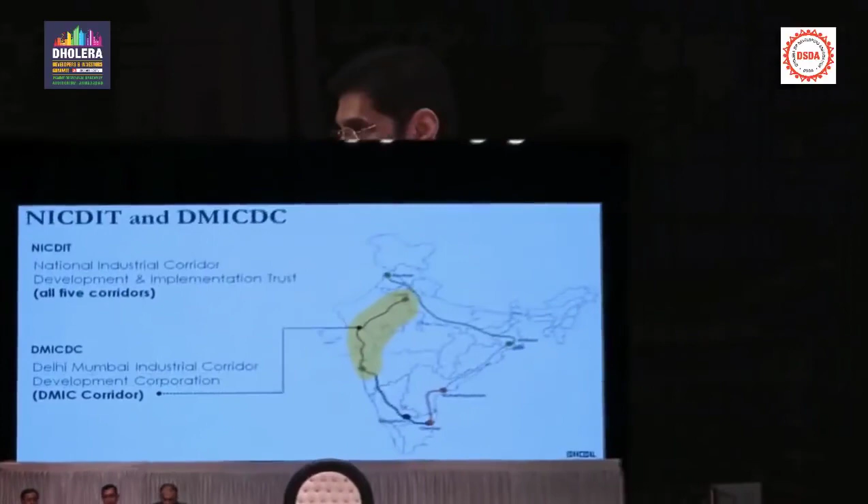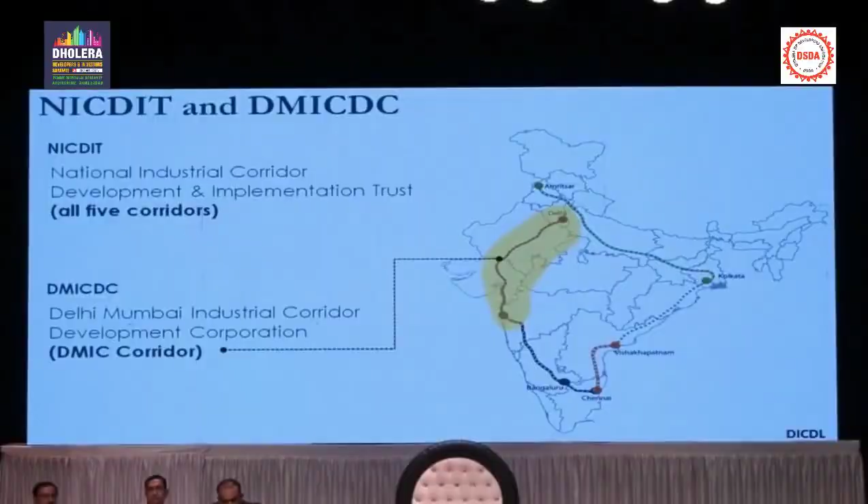So now you know the difference between where Dholera is as a greenfield smart city and where the other smart city programs are. They have no connection, the funding mechanism is different, and the management is completely different. But they are routinely mixed up. One is called the other, and people call me a smart city Dholera, and they think I'm a part of the brownfield smart city.

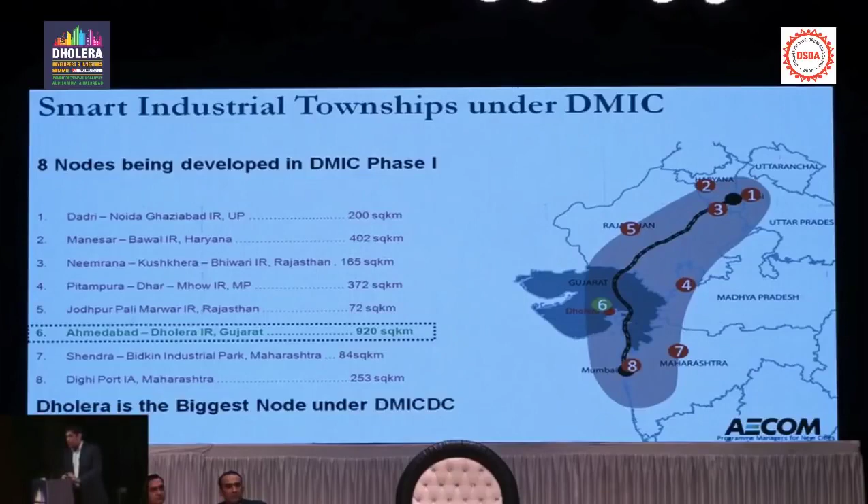So on this Delhi-Mumbai Industrial Corridor, there are 8 different nodes, as they call it, industrial areas that are planned. And you can see number 6 is Dholera. This is the largest node on this Delhi-Mumbai Industrial Corridor. So Dholera is the largest. It is also the node that has come farthest along in terms of construction.

So how big is Dholera? Dholera is 920 square kilometers, but if you compare that to some countries like Singapore, it is even bigger than Singapore. So we are almost building a country like Singapore, because Singapore is 71,900 hectares and Dholera is 91,000 hectares. So it's almost 20% bigger than the country of Singapore.

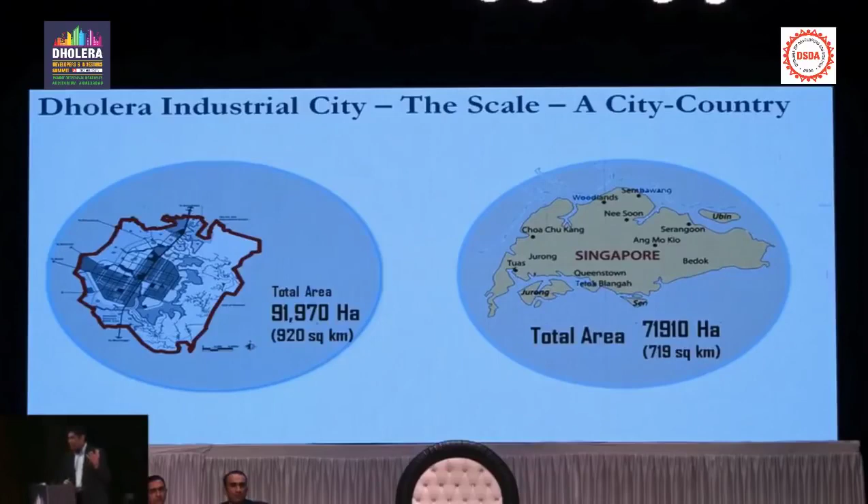So now you can imagine why it takes time, and I will explain that also. But when it's completed, after everything is finished, 30 years later the estimate is Dholera's population will be 2 million people, 20 lakh people will live there, and approximately 800,000, 8 lakh new jobs will be created. These jobs will increase our manufacturing GDP.

These are all new industries under the Make in India program, which is what's going to create the economy for India.

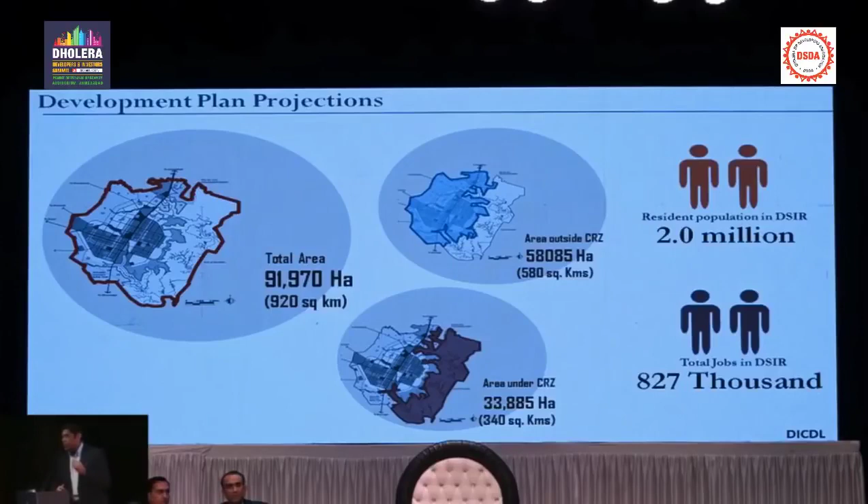I've been working on this project since 2013, and a very common question that comes to me is, why does it take so long to build a city? So I wanted to show you the timeline as to why it takes so long.

In 2009, we enacted the SIR Act. But once the SIR Act is enacted, several things have to happen before you start building a city. You have to create a development plan, which takes some time. The development plan then has to be approved. To get a sanctioned development plan takes anywhere from 3 to 5 years, because it's a formal, official document of the government of Gujarat. It has a public review process, a public comment timeline, and it takes that long.

You cannot rush it. It's like saying, deliver me a baby in 3 months. The baby will take 9 months, give or take 15 days, maybe a month. So a development plan will always take 3 to 5 years because it's a time-consuming process.

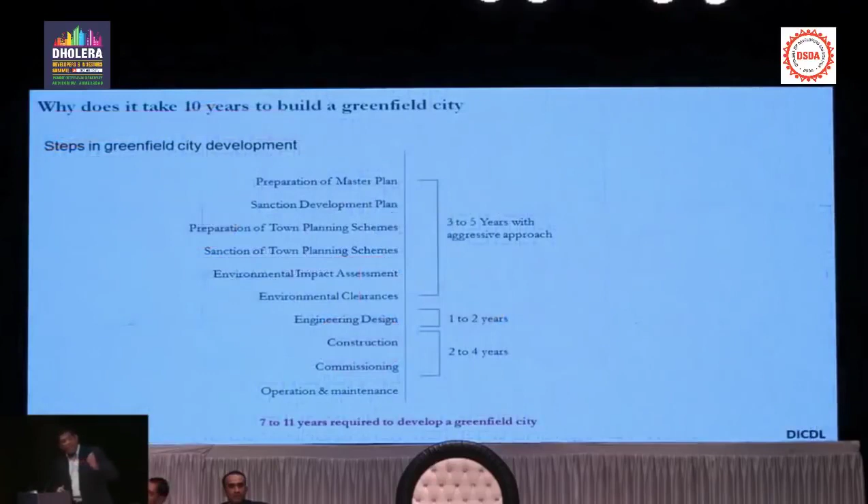After the development plan, we have to do the design. After the design, then we have to do the construction. So you can see, by the time we go through the entire process, we are anywhere between 7 to 11 years.

Now Dholera, when it was advertised, Modi ji first announced it in 2009 I think - Dholera city will come, it'll be built very big, like Singapore. And everybody was saying, how delayed it's becoming, you cannot build a city. But now you can see why it takes time.

There's no way - maybe a year or so we could have expedited more. But some of these things take time - development plan, design, construction. These all take time, and it takes 7 to 11 years to build it.

I also want to put in perspective Songdo in South Korea, which was the latest brand new city like Dholera that's being built, started in year 2000. And today, in 2017, it is only 50% built, and it is only 8 square kilometers. We are starting with 22 square kilometers, going up to 900, and Songdo is only 8 square kilometers, and it's taking them 15 years.

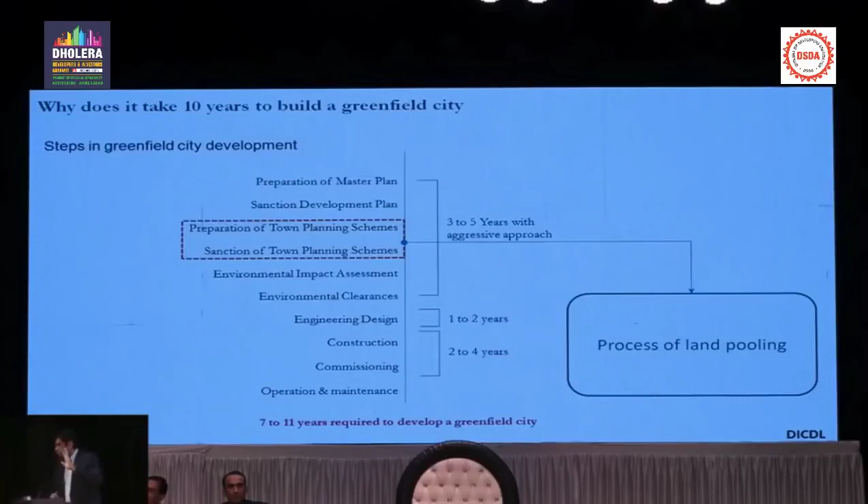So we are not behind in terms of benchmarking in the world. We are doing a great job. I want you all to know that the state of Gujarat, the Gujarat bureaucracy, and the engineers are all doing a fantastic job. So don't worry, this will happen, and I will show you how this will happen.

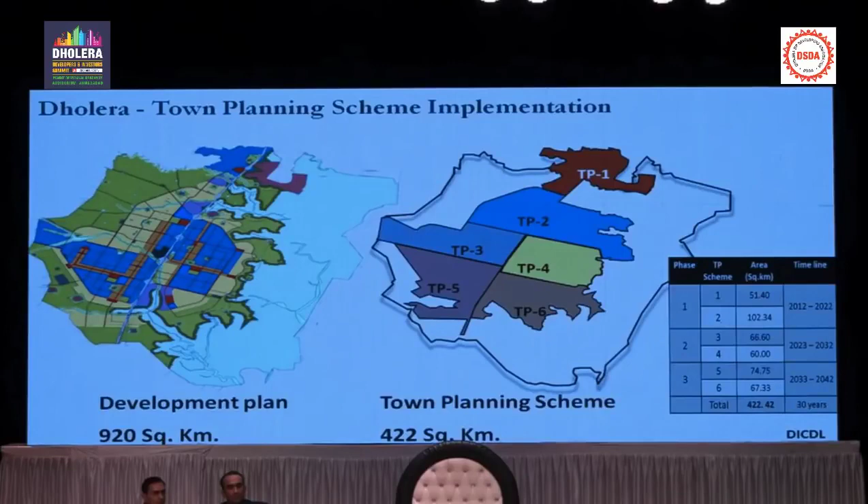Phase 1 is up to 2022, and we are doing the construction. After that, phase 2 and phase 3 will start. Within phase 1, it's 153 square kilometers, which is TP1 and TP2. We started construction work on this in 2013-2014.

But we soon found out that the cost of building trunk infrastructure - those of you who are in construction will appreciate this - for 153 square kilometers is close to 40,000 crore. Now who will give us this 40,000 crore investment? Because there's no private investor that's going to come and build all the pipes - water, wastewater, power, gas - everything has to be built, right?

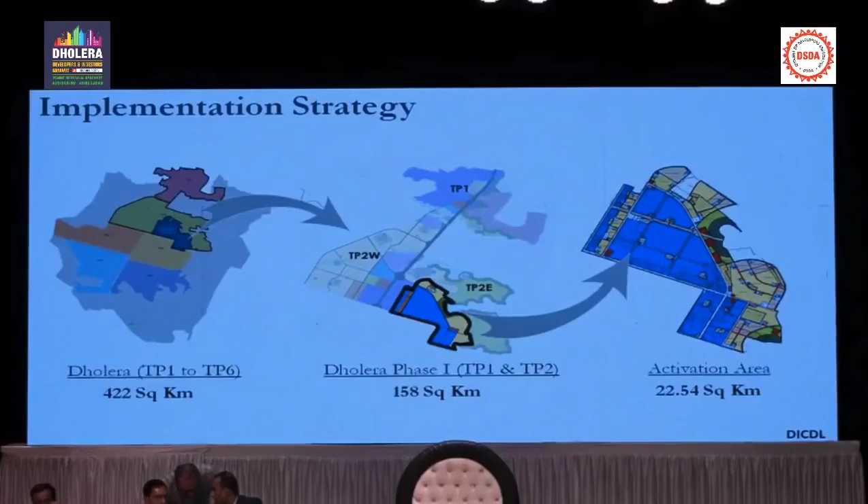Gandhinagar's planning started in 1965, and even now it's not 50% complete. So you can see new cities take time, and 22 square kilometers is not a bad size. It is a big size, but because of industrial production, it is going to go very fast once companies start relocating.

So in this 22 square kilometers, this is the breakdown. In 5 years, we will have 76,000 jobs in Dholera, in the activation area. Population will be about 1 lakh. And this purple area you see is completely industrial. So majority of the activation area is completely industrial.

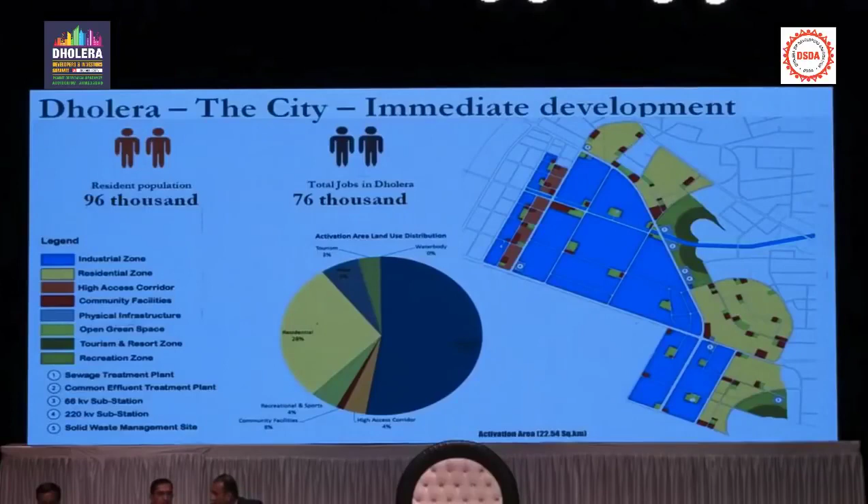That's where our first client will come, tenants will come, and that's where the city's beginning will happen. And all the yellow is residential, the green is green cover, and all the red dots are public amenities, parks, playground, water, sewer, those kinds of things, power plant.

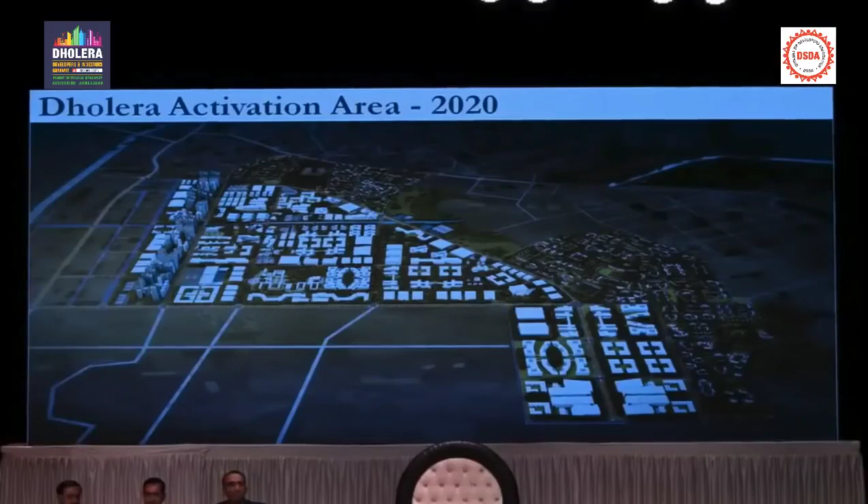So 22 square kilometers is our footprint, this is our footprint of 22 square kilometers. And this footprint, Dholera, is going to be managed by DICDL.

DICDL is a special purpose investment vehicle, SPV I should say, which is formed between DMIC-DC and the state government of Gujarat. And this is a special partnership, a 51-49% partnership, in which DMIC has put in 3,000 crore cash, and the Government of Gujarat has given 3,000 crore worth of land. So our corpus became 6,000 crore.

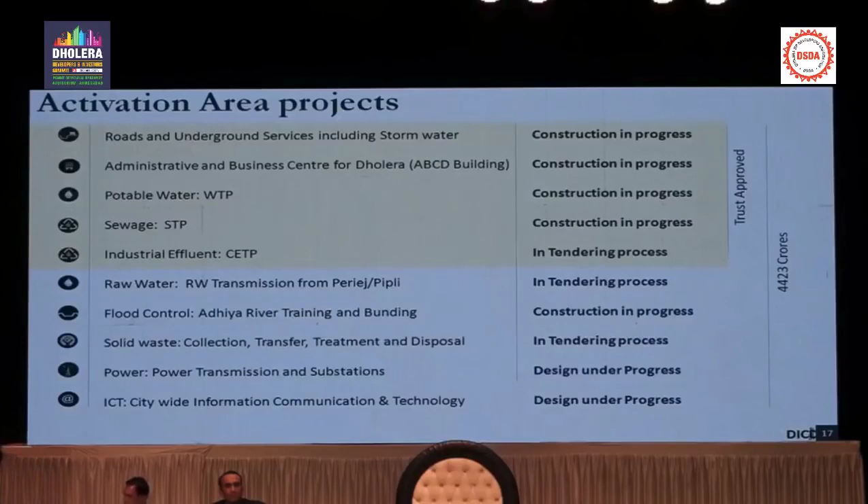The balance of the money, 4,400 crores, we are going to find some PPP, private partner. It is mostly in the power and water side, and we will figure out how we will get that funding part done. But right now we are proceeding.

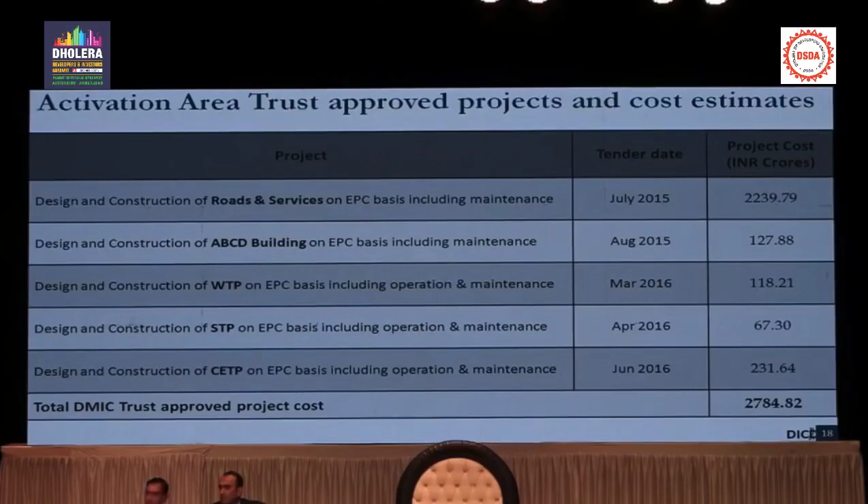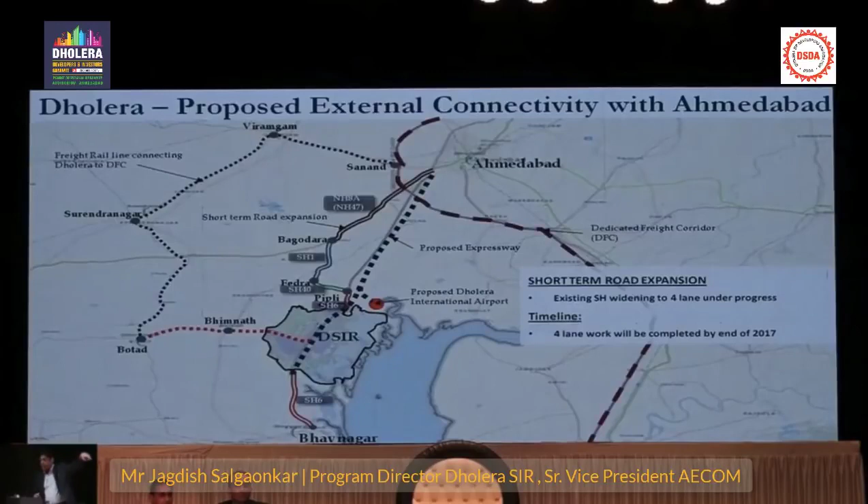I also wanted to point out the existing state highway - I'm sure all of you who have driven there have noticed that it's being reinforced. The main reason for that is because the expressway will take about 4 years to build. We did not want to take any chance, so we are already strengthening the existing SH6, SH1 and 40. They have already been strengthened, and lanes have been added for capacity. I'm sure those of you who drive down there have noticed that.

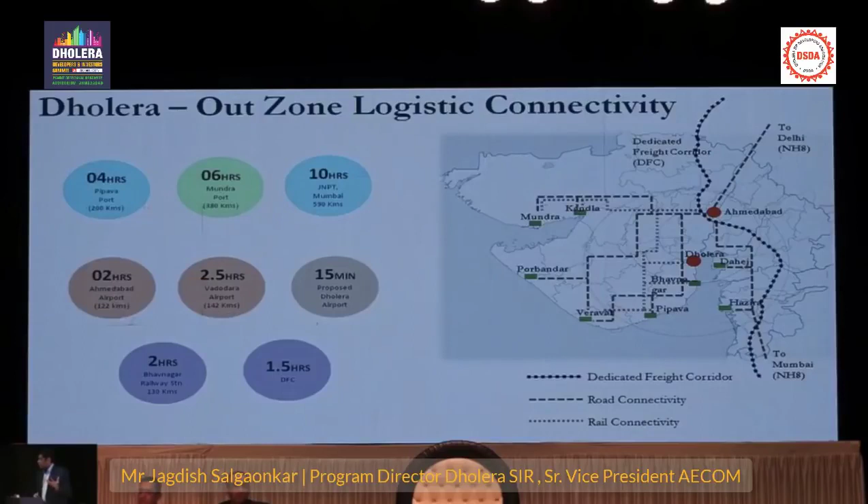Overall, from a connectivity standpoint, once you are near Dholera, it's extremely well connected to all the ports by road and rail. This is a slide we created for our industrial clients to show that within a 6-hour drive, they can be in Mundra, or within a 2-hour drive, they can be in Bhavnagar, because our industrial clients mostly want to know how they can evacuate their manufacturing goods. So they have easy access to airports and ports, both by rail and by road.

Okay, so now let me switch gears a little bit and speak about smart cities. I'm sure the word smart cities has been so overly used that people are curious what a smart city actually means. Can anyone give me a one-line definition of what smart city means to them? Does anyone have that? Okay, well, I'll give it a shot then. This is sort of my own definition, compiled from many different sources, but it's really our thinking of what we have come across.

A smart city - the city itself is an inanimate object. It is just a dead thing. But what makes it smart is that we have installed systems, processes, and devices into this infrastructure so that the people, you, the businesses, can make smart decisions.

So let me give you a few examples of smart decisions. I'm sure most of you may be familiar with Google, right? Nowadays, if there's a traffic jam somewhere and you need to go from Ahmedabad somewhere, how many of you Google frequently and ask where the traffic is and which route to take? Quite a few of you - I've seen some hands. So what does Google do? Google takes the data and gives you the information so you can make the smart decision, correct?

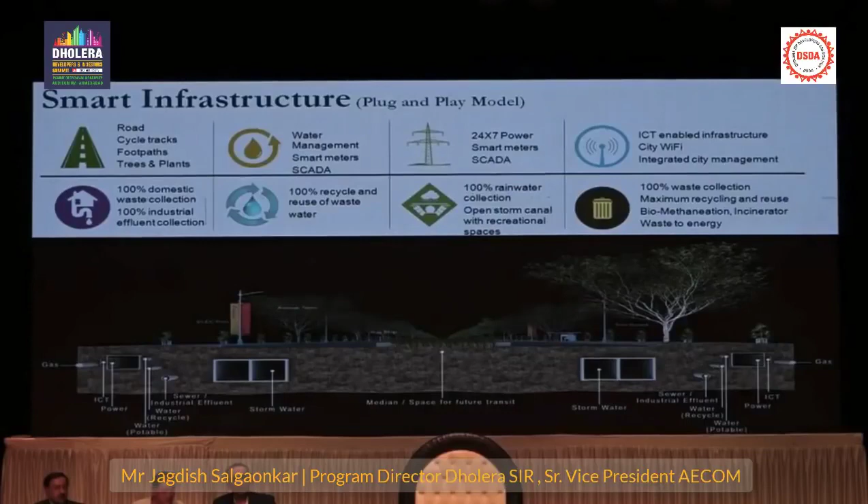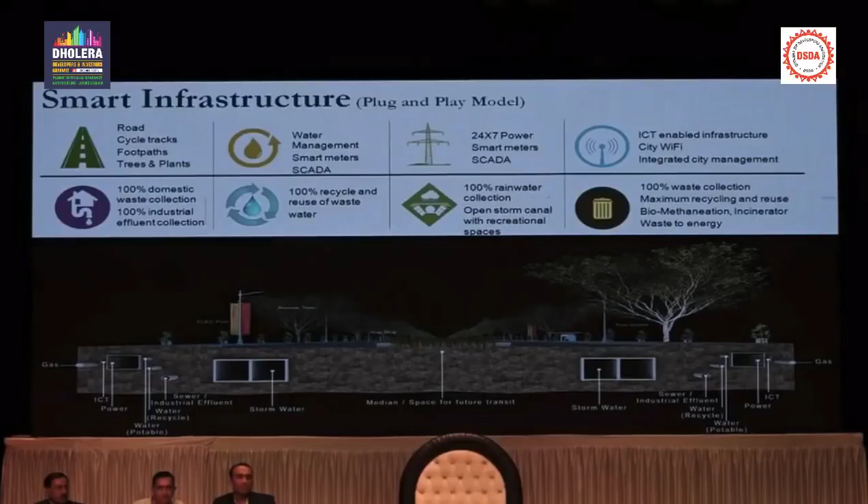So here's a snapshot of everything that we are building. This is a typical cross-section of our road, and there are a couple of points I want to make here. Number one, first time in India, we are building all of the trunk infrastructure underground. Water, power, ICT, gas, wastewater recycle, everything is buried underground, even the power lines.

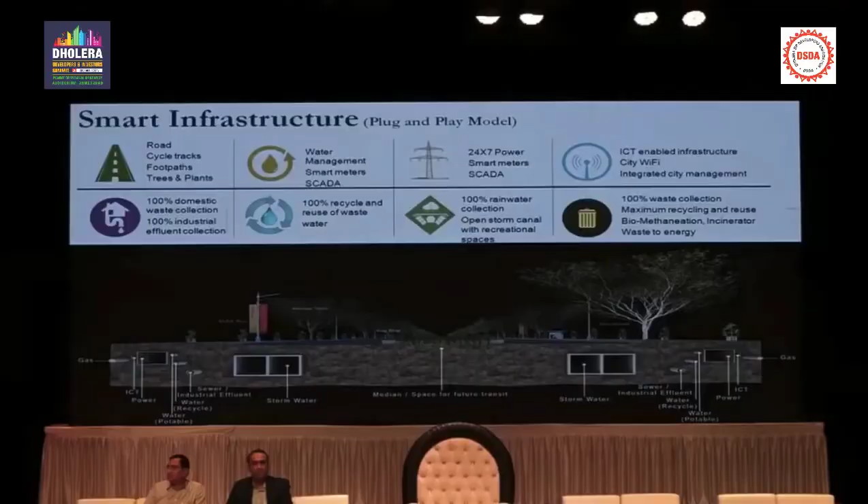So all this costs money. You don't get this kind of infrastructure in any industrial estate in India, in any city in India. That's why Dholera is world-class and the best.

So in terms of different infrastructure, I just want to give you the highlights of each one of those components. In roads and services, for example, we are building almost 300 lane-kilometers of road. It's a total of 72 kilometers of road, but with multiple lanes, so we call it 300-kilometer lanes of road.

Completely traffic-integrated sensor system. Each traffic light is going to have cameras, speed limits, sensors. So all that information I talked about, devices being smart, will be transmitted back to you so you can make the decision which road to take. That kind of information is going to be proactive, not reactive.

So we have dedicated cycle tracks. You can see how the cross sections are designed. And this is the overall roadmap. And what you will see right now is...

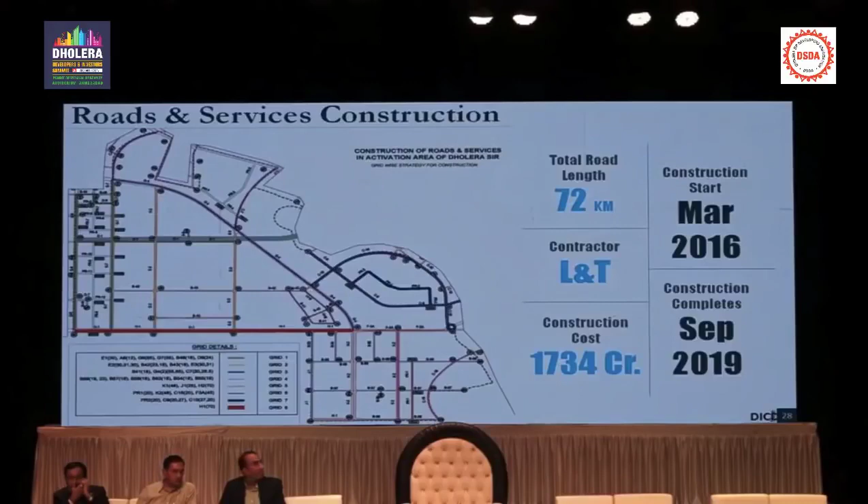It doesn't work on the screen, but G4, that line that comes from Dholera village, that is the road G4 right now that's being built. I'm sure anybody who has gone to Dholera right now can start seeing the city is beginning to take some shape and form.

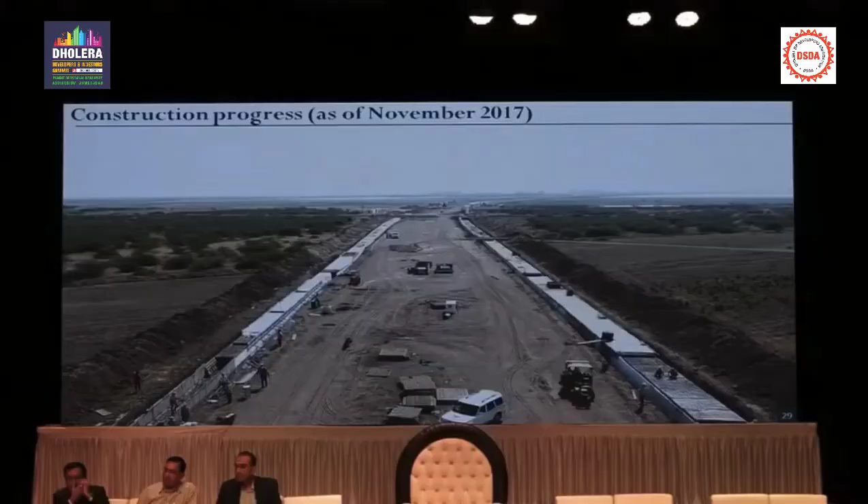So everything underground is built. Slowly it has to come up, and most of you know that Dholera is a very difficult area for construction because the soil conditions retain a lot of moisture. So you have to dry out the moisture, compact it correctly, so the roads will last 30 or 50 years. That's what we are doing, building these roads right now.

So in terms of power, like I said, completely underground transmission system. Power is going to be available in March 2019. Right now, we have invited private companies, both Torrent and Adani are applying for the license with GERC, and GETCO is building the transmission line. So both of those components will be ready by March 2019 at the latest, or even sooner.

Then in water, which is by far our smartest component because of the technology the way it is, we have quality meters, so you get the ultimate best quality of water.

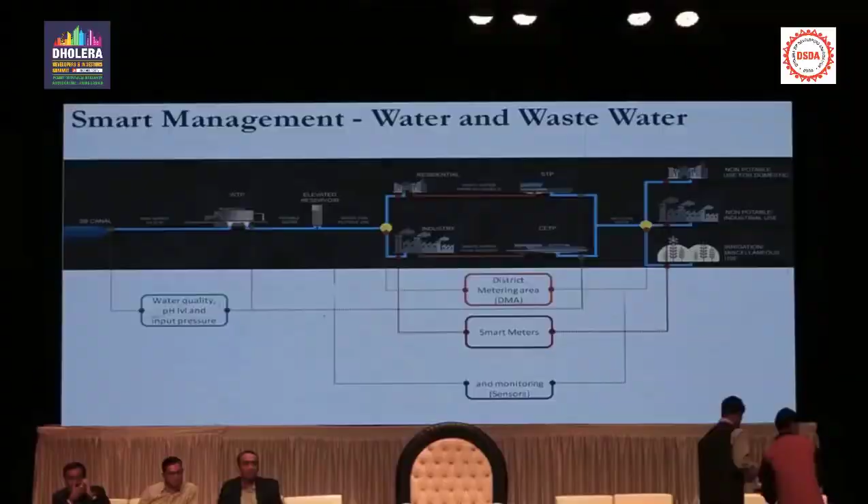We have district metering on water, and then we have smart meters as well as leak detection systems. This is another component which, to you as consumers, is going to save a lot of money.

Leak detection is a major problem in all the cities in India. For example, in Mumbai, about 34% of the water that's produced, which is paid for, gets lost or stolen. In Ahmedabad, about 17 to 23%. And who pays for the lost water? The existing customers pay, right? Because it has loaded onto your cost.

In Dholera, we will not waste more than 4% of water, and that is only because of evaporation, transpiration, and whatever is required to wash down the machinery. The rest of the water is going to go back into the system. That means higher efficiency, lower cost.

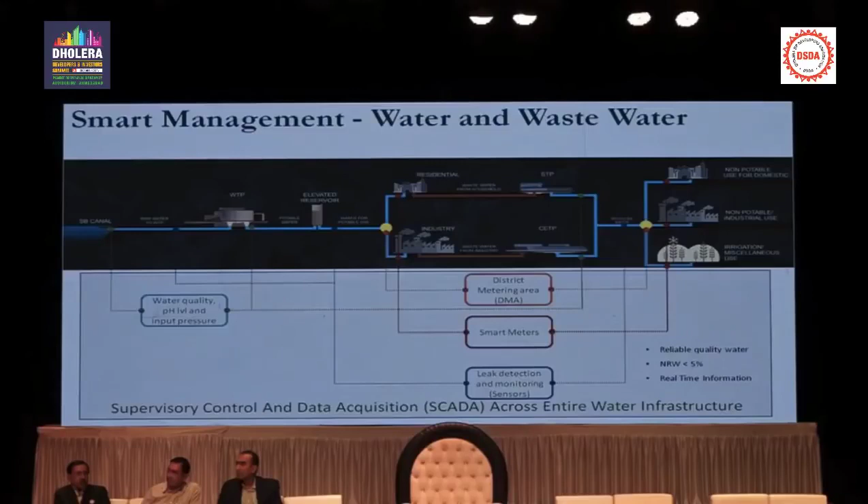All the points I'm making are that we are installing all these smart features not just to increase the cost, but because eventually the consumer is going to pay less in the long run. All we look at is life cycle cost savings. That's what we look at.

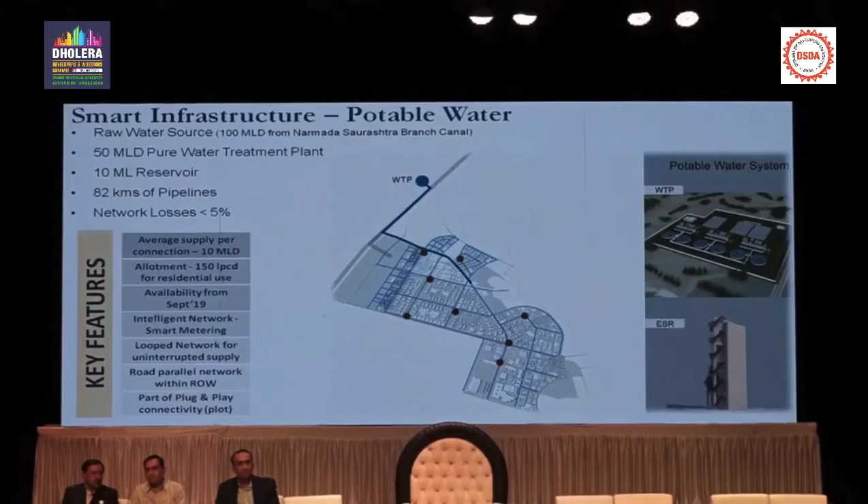Recycled water is another unique aspect of Dholera, we have 100% recycling of wastewater. I think this is probably the first city in India doing 100% recycling, and all of this wastewater is going to be used for industrial water use.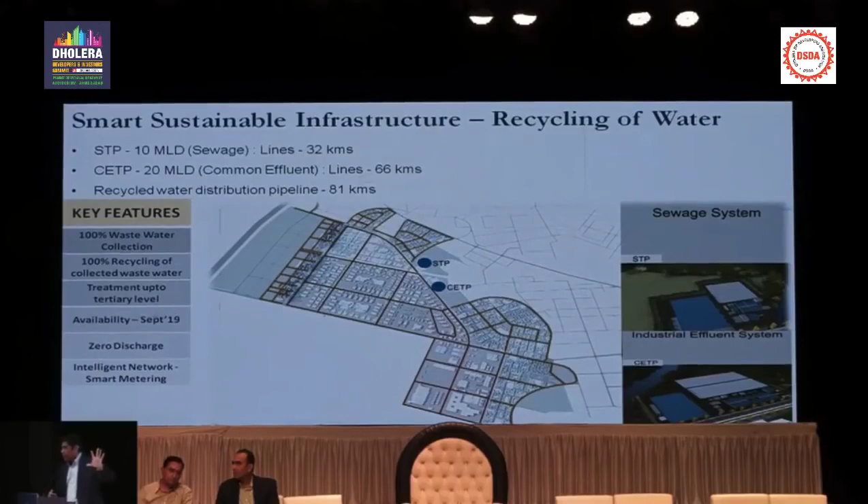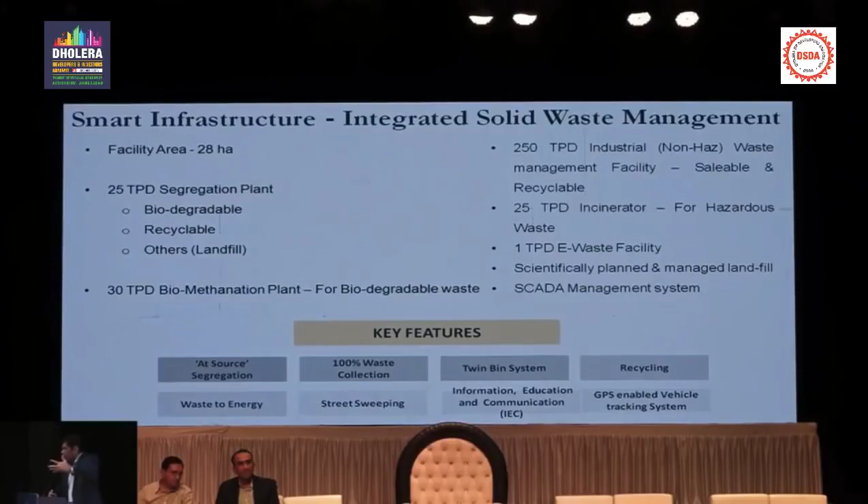In terms of solid waste, it's door-to-door collection. Everything will be collected in separate bins, 100% recycling, composting, biomethanation, gas production. So all of those things are planned. Although solid waste will take some time, because as people come in, you generate garbage, you don't need it on day one. So maybe 2 or 3 years down the road, we will do that.

So this is our investment. You will not find any other city in the world building these kinds of sensors and technology into its smart city structure.

So that leaves us with the infrastructure components. Now let me get into the urban transit and livability aspects of Dholera. So far we have talked about businesses, infrastructure, and utilities. This shows you what we are planning from a transit standpoint for Dholera.

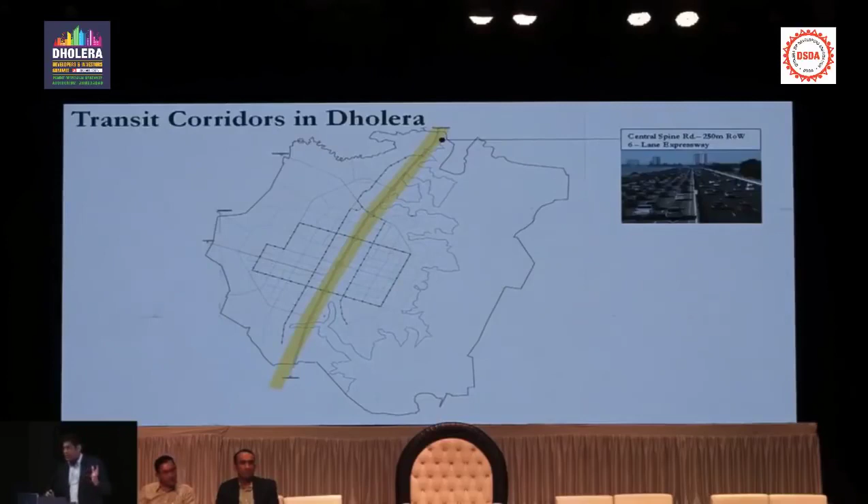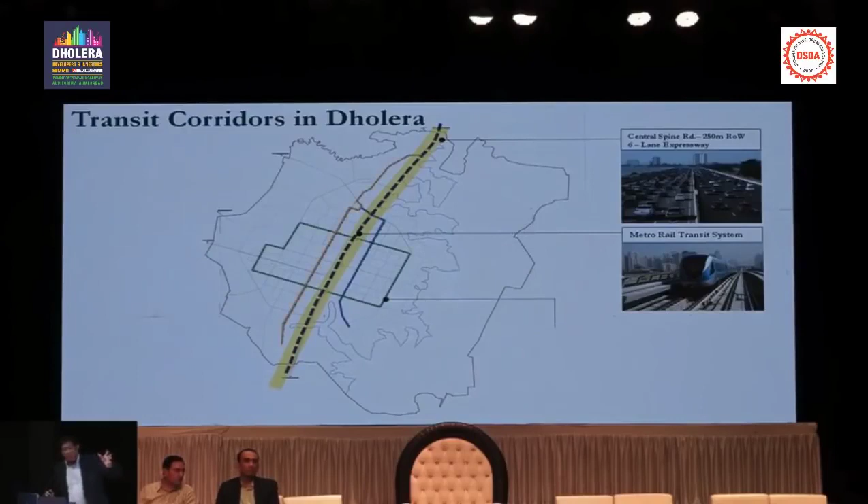Like I mentioned earlier, there is a metro within the expressway. The yellow line is the expressway, and there is a metro that's going to run from Ahmedabad to Dholera. It's currently on the JICA funding plan for 2019. Then there is a light rail system planned, shown by the green and blue lines.

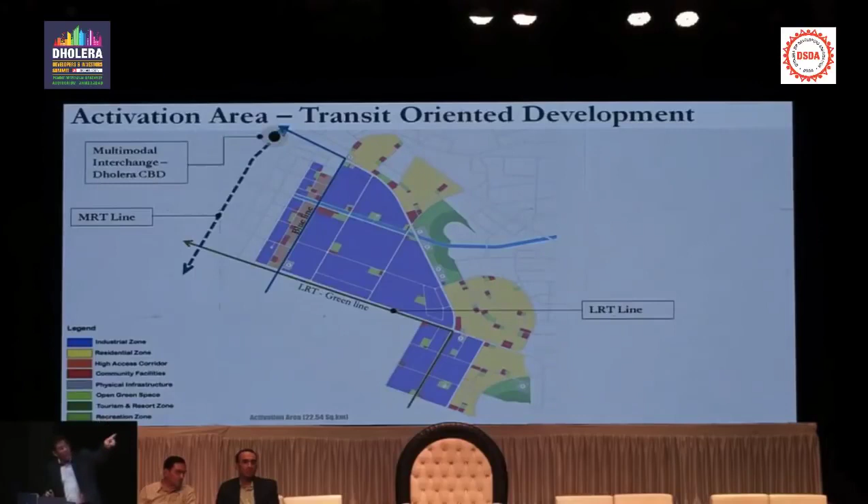I also wanted to show you the transit-oriented development we are planning, where the metro is coming on this line. You've got the green and blue light rails, and then you've got the bus terminal, and this orange patch we show is our high access corridor. High access corridor is mixed use development, high FSI, and it's going to be like what they would call downtown, a transit-oriented development with all kinds of businesses, commercial, and residential development going on in one place.

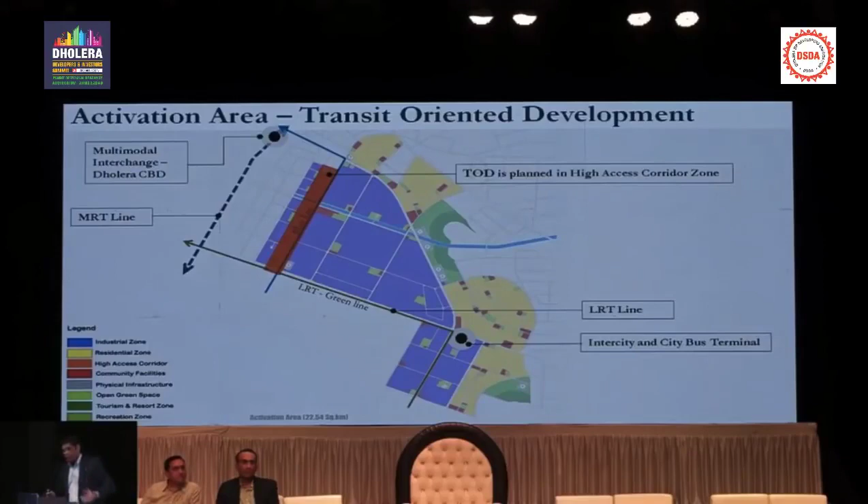All of you know Dholera is a very flat land. People routinely confuse flooding and flooded area with inundation. That is a technical difference between the two terms.

Inundation means when water has nowhere to go because the land is so flat that it has no ability to drain. On normal land, when rain falls, water flows wherever the slope takes it, into a river, a canal, or the sea. But in Dholera the land is so flat that from one end to the other there is only a 1.5 meter drop, so water has no place to go. When it rains or rivers flow, the water simply spreads out, and in technical terms we call that inundation. We have built very good engineering for this. I don't want to say this is the first time in the world, because there are many cities that have tackled an inundated area.

The most prominent example is Venice. Venice is actually underwater. How many of you have visited Venice and know how beautiful the city is? If they can survive there for 500 years, Dholera is nothing, at least here I can see the ground, in Venice you can't even see the ground. New Orleans in America is another area that is completely underwater, but people have lived there for the last 200 years.

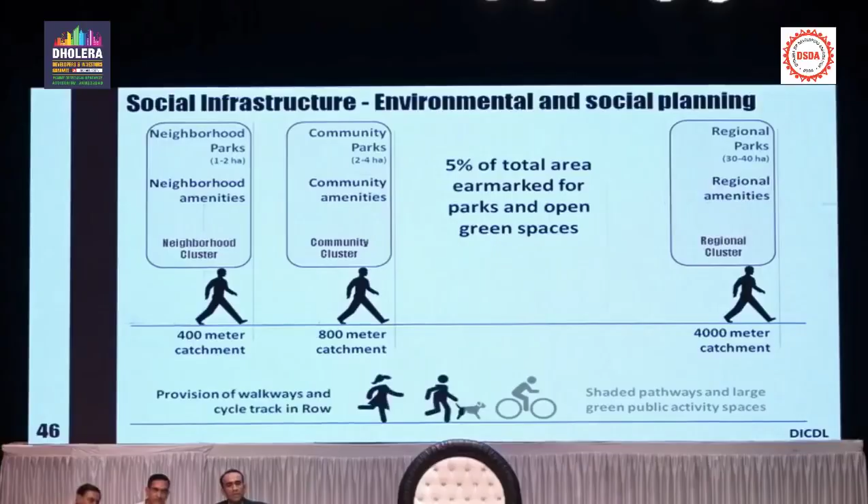So what are we providing in each of these parks? At the regional level park, we have many different facilities clustered around the park so it's easy for people to find them. When you come to neighborhood and community levels, a neighborhood park will have a primary school, nursery, and local markets, while a community park may have integrated schools like a high school, an Anganwadi, and a community market. So there's a distinction between a short walk for smaller, quicker needs, and a bit further walk for larger activities.

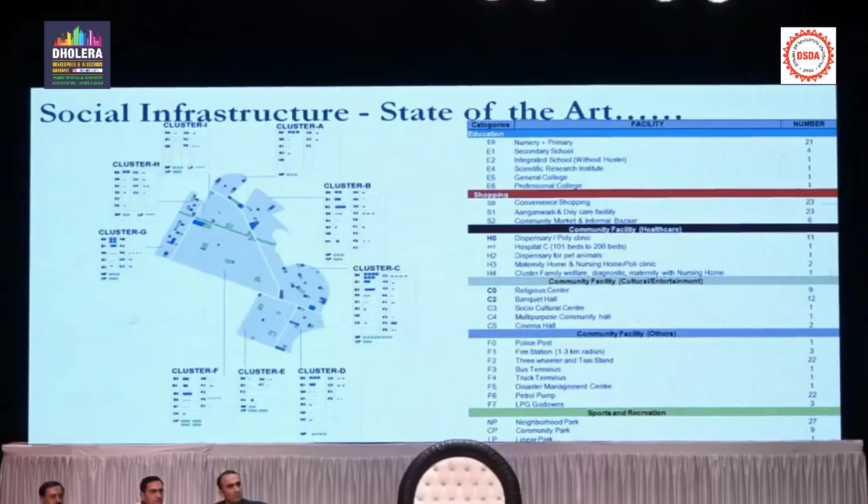I talked about the canal earlier, and we see great opportunities in the canal, particularly for me, coming here to Dholera and designing a brand new city.

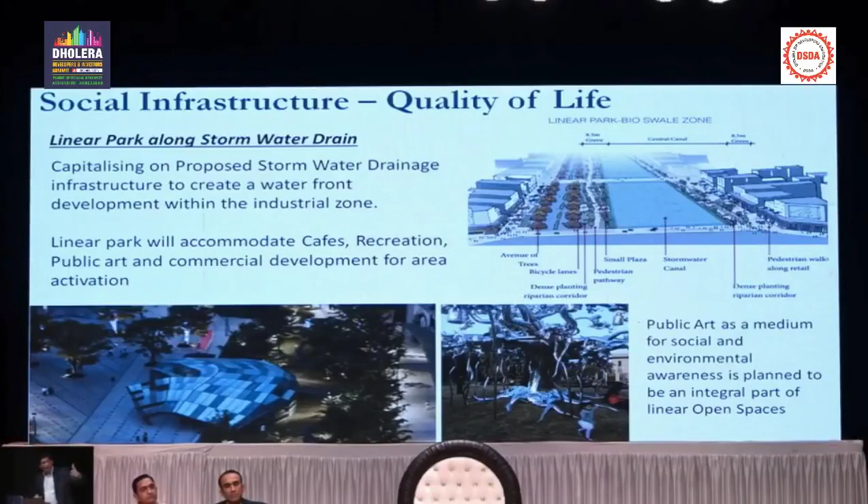So we are trying to bring that back through this whole canal feature, where we may have art and artistic expressions. We may create zones that will allow people to showcase their art and culture. We may create zones where we can demonstrate Swachh Bharat and some other national initiatives. So we are trying to create an environment where family is just as happy as businesses, where we have a lot of open spaces, a lot of parks with good kindergarten schools, good school education, good public hospitals, and public facilities. So all of these things are pre-planned. Now all that we need to do is get this tremendous audience interested and start building, right?

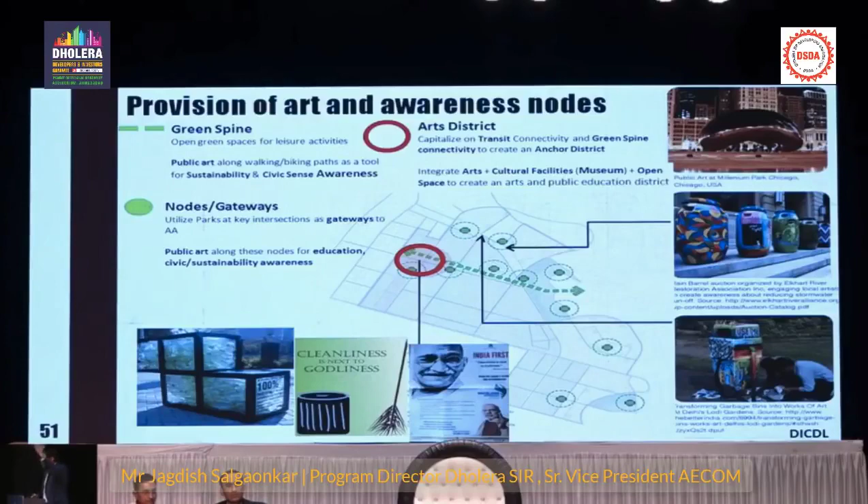Ahmedabad uses a miniature version of this now. They have a police command control center. Surat also has one. But for a citywide system, nobody has one yet. So Dholera will be the first one.

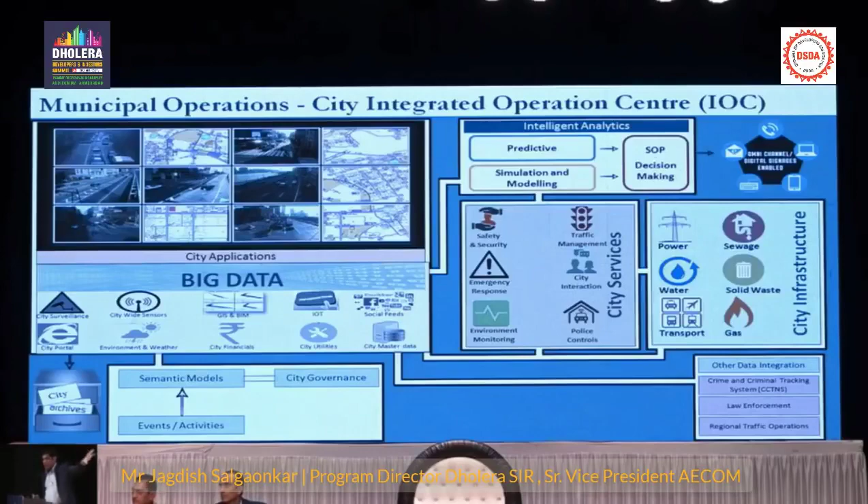And what I mentioned earlier, this whole cycle of gathering data, bringing the data into the control room, writing the computer algorithms and analytics to give you the knowledge to make smart decisions, is going to happen here. This is the brain of the city, which is going to reside in the SPV building. You saw the building earlier that's being built.

Smart governance is again a wireless form of government. Nobody should be required, in today's day and age, to walk to City Hall or city offices to get a driver's license or pay fees or bills. All of that will be online. You should be able to do it on mobile, you should be able to do it on your laptop. Everything will be online, and this is going to be built in.

This is already being done in many places throughout India, because this is the easiest place to convert a brownfield city into a smart city. So a lot of the brownfield cities are already doing this. But for us, it's going to be a way of life in Dholera, part of our...

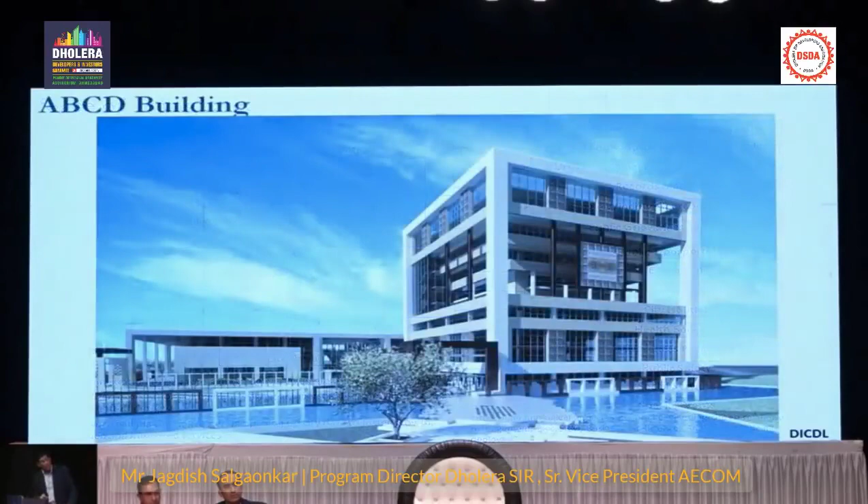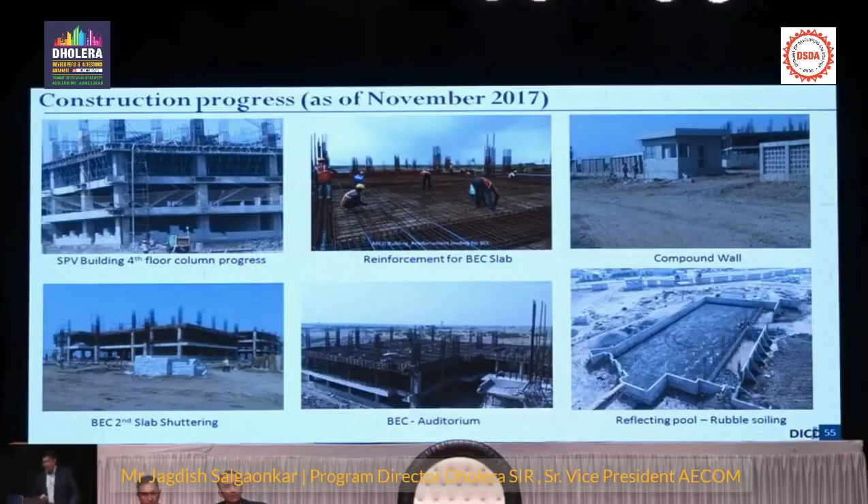And this is the ABCD building. I mentioned this is the construction that's already going on. You can see some of the pictures there. I think the video shown earlier was a fantastic video that showed you some insights on the construction that was going on.

So probably of most interest to all of you is, what are we selling, when are we selling, and for how much are we selling? So you can all do your businesses, and I see a lot of crorepatis in here in the next few years.

This is all of the zoning that I mentioned earlier. Purple is industrial. The same thing you can see on the right-hand side is all of the plot sizes. So we have 0 to 5 hectare, 25 plots; 5 to 10 hectares, 17 plots. Now those plots are owned by the government. There are many, many private players in the activation area. We have not listed their plot sizes yet. This is only what the government is selling right now.

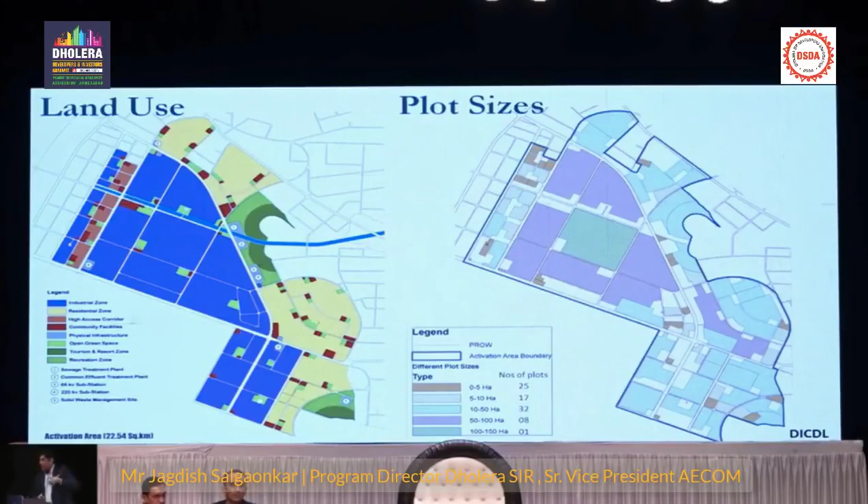This is what we are targeting our audience for, which is the industrial clients that we are selling to. We have also advertised heavily for selling our land. We have made a commitment that of the initial 5,600 hectares, we will give allotment in 17 days and possession in 90 days. This is by far the fastest commitment we have made. This is our commitment to efficiency and transparency, and our complete land allotment system is online.

Anyone here can go online right now, that's the address right there. You can go online, you can select the plot, you can click on the plot.

It will give you the information on the plot, what the dimensions are, what the setback is, and you can make an application online. That application goes to our general manager, Dilip Brahmbhatt, who's sitting right here. He then processes it and puts it up to the MD for approval.

There is a land allocation committee that votes based on the businesses. If the industry falls into one of the categories we really want, which is the mega investment category, and there are several formulas for that, we offer several incentives and discounts. So a lot of industries are right now talking to us, and they are all looking at it. As soon as we get a little bit above ground, I think in the next 3 to 6 months, we should have some idea of who our anchor tenants are going to be.